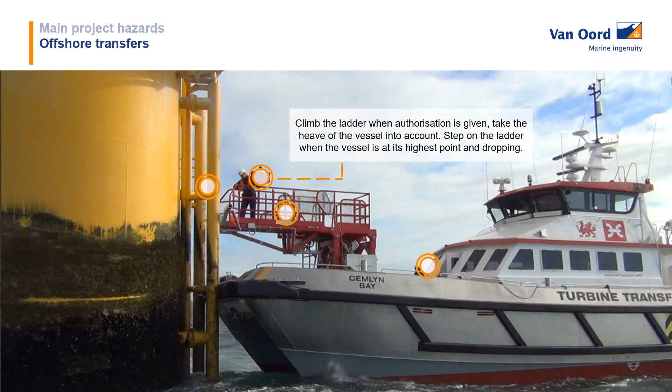During offshore transfers, climb the ladder when authorization is given. Take the heave of the vessel into account. Step on the ladder when the vessel is at its highest point and dropping. Don't rush while climbing, maintain 3-point contact and do not carry luggage.

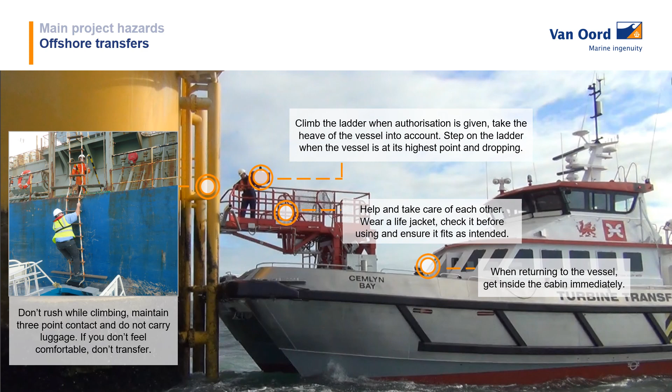If you don't feel comfortable, don't transfer. Help and take care of each other. Wear a life jacket, check it before using and ensure it fits as intended. When returning to the vessel, get inside the cabin immediately.

Check these points on a life jacket before wearing it. Do not use the life jacket if one or more of these points are not okay. The life jacket must be clean and undamaged. All points on the inflating device must be green and the cylinder must be unpunctured.

The manual inflation cord must be visible and ready for use. The life jacket must be certified as indicated on the sticker. If not present, the life jacket cannot be used. The stitches must be undamaged, the belt adjustable and the clasp closing properly.

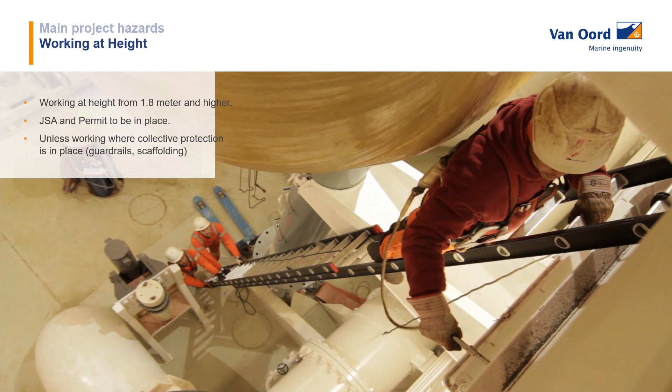When working from 1.80 meters and higher, the work is considered as working at height. A working at height permit must be in place and a job safety analysis has to be made. The only exception is when working with collective protection and guardrails or scaffolding installed.

When using a ladder, maintain 3 points of contact, do not work on the top 3 rungs, do not overreach, and use a fall arrestor. Ladders are primarily designed to get from A to B and can be used for approximately 30-minute activities only. 10 kg is the maximum load that you can work with when standing on a ladder. No lone working is allowed, people must help to stabilize the ladder at 75 degrees. The ladder must be secured at the bottom and the top, to prevent movement.

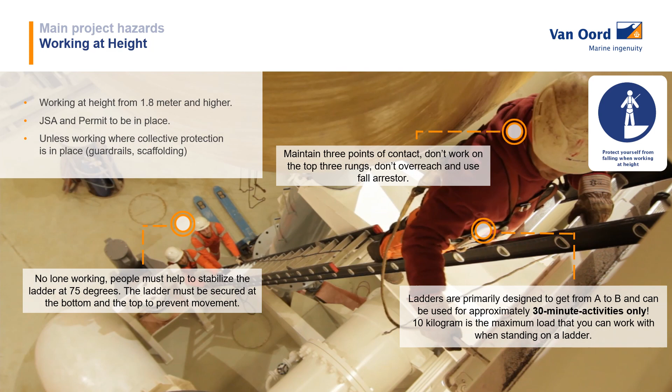Many heavy equipment-related incidents occur within our industry. Always position yourself in a safe zone. If you observe blown-over signs, barriers or safety cones, don't wait for others to put things back in place. If you see it, you own it.

Don't stand near and especially not behind a vehicle. Stay in well-protected zones and always wear your high-visibility clothing. If you have to approach a vehicle, ensure eye contact with operators, see and be seen. Wait until the vehicle is completely stopped.

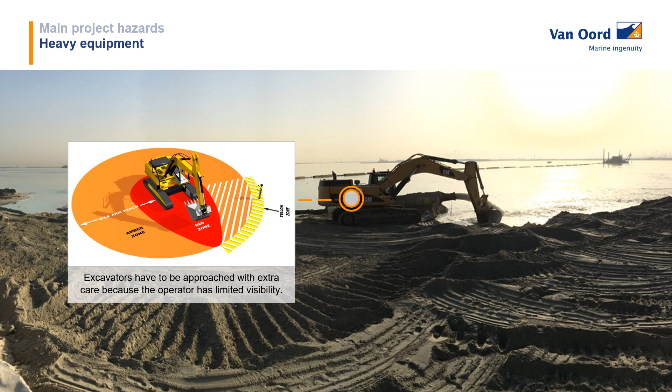Excavators have to be approached with extra care because the operator has limited visibility.

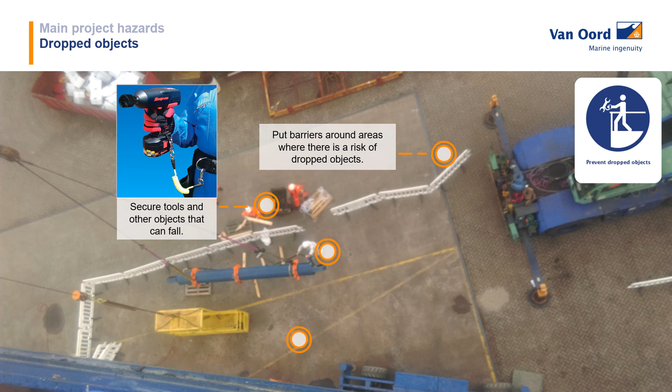To prevent dropped objects, secure tools and other objects that can fall. Put barriers around areas where there is a risk of dropped objects. Use suitable lifting arrangements, secure the load properly and use lifting bags to lift tools. Maintain good housekeeping to avoid loose objects. Guard rails and scaffolds must have toe boards to prevent dropped objects.

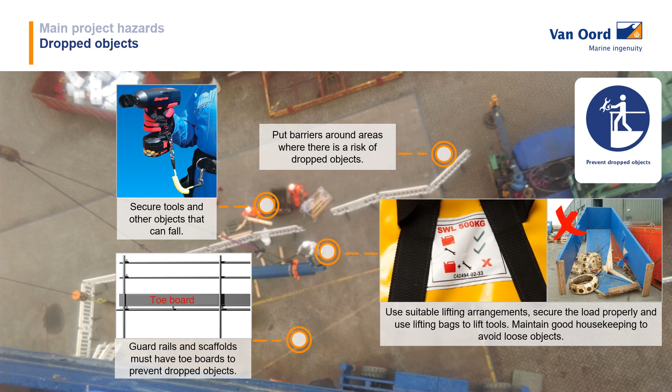The main hazards of chains and lines under tension are the snapback zones, and slips, trips and falls. Mooring lines are handled by a competent person. Never stand on or walk over tensioned lines, and do not stand in the eye of a line.

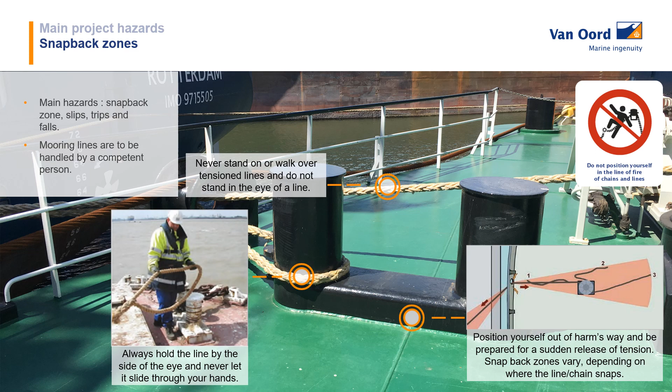Always hold the line by the side of the eye and never let it slide through your hands. Position yourself out of harm's way and be prepared for a sudden release of tension. Snapback zones vary, depending on where the line or chain snaps.

The following applies for all types of lifting. Follow the instructions of the person in charge of the lift. Do not walk under the suspended load. Lifting zones must be marked and have barriers placed, both on marine equipment and onshore. Do not enter these zones and take the load shadow into account.

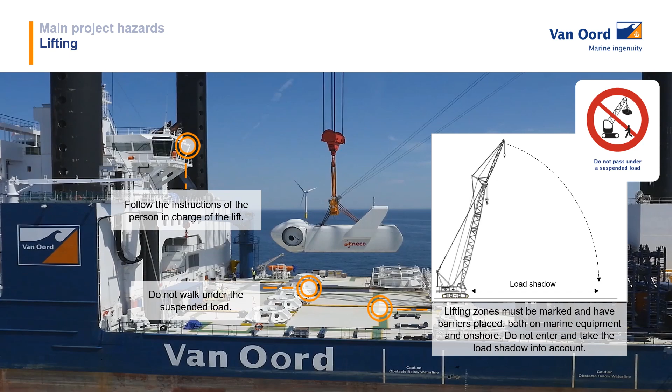A permit to work and job safety analysis have to be in place when working on energized systems. Only competent and authorized persons are allowed to work on these systems. First, check and measure energized systems before taking any action.

Ensure no stored energy remains. Confirm that isolation measures have been taken, such as locked switches, locked doors and closed pipes. Use a lockout-tagout system. It may only be removed by an authorized person.

Confined spaces are identified as one of the 9 high-risk activities at Van Oord. A confined space, such as a tank or pipe, has difficult access and ingress. It can contain explosive gas or poisonous air, or you can encounter other dangers such as lack of oxygen, dropped objects and slips, trips and falls.

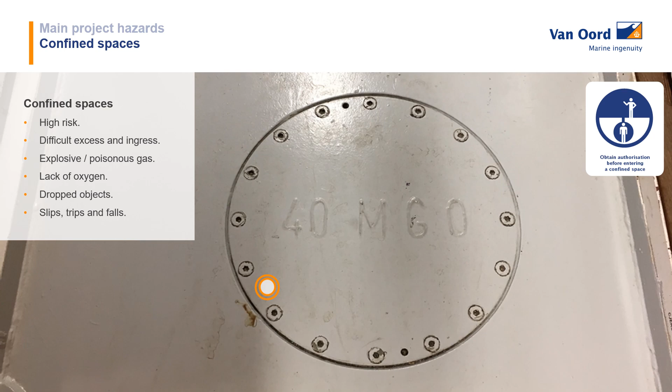We do not enter tanks which contain or have contained chemicals or fuel and do not perform the gas measurements. A certified third-party company must be hired.

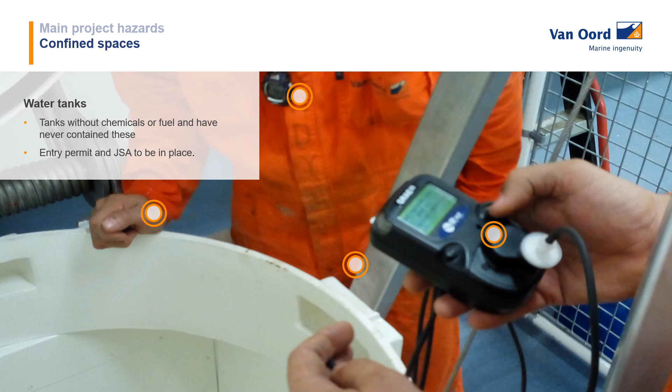Water tanks are tanks without any chemicals or fuel and have never contained these. An entry permit and job safety analysis need to be in place. Before going inside, establish ventilation and measure the air quality in the confined space.

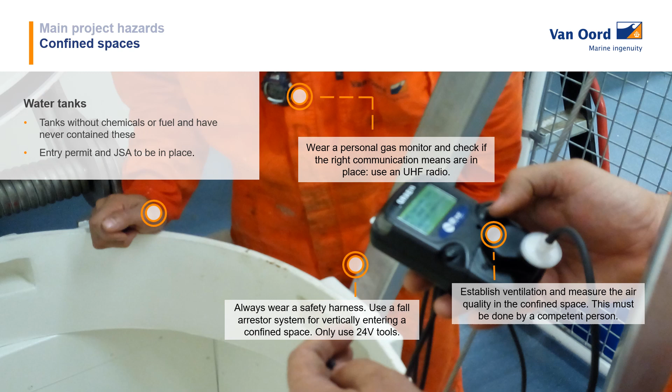This must be done by a competent person. Wear a personal gas monitor and check if the right communication means are in place. Use an UHF radio. Always wear a safety harness. Use a fall arrestor system for vertically entering a confined space. Only use 24-volt tools. The manhole watch is on standby and alerts the rescue team in case of an emergency.

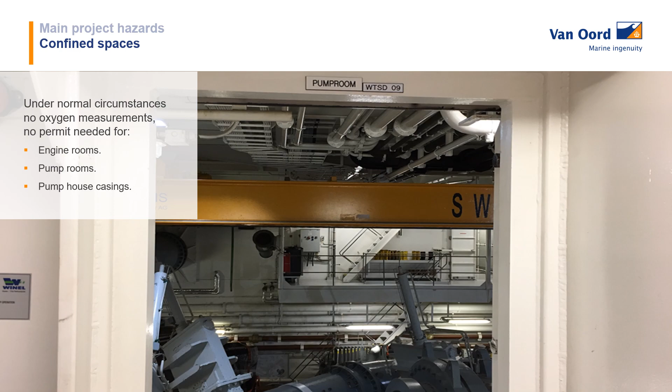Under normal circumstances, no oxygen measurements are required, and no permit is needed for engine rooms, pump rooms and pump house casings.

Poor housekeeping are often the cause of incidents. Examples of hazards are tripping over loose objects on floors, stairs and platforms, being hit by falling objects and slipping on greasy, wet or dirty surfaces.

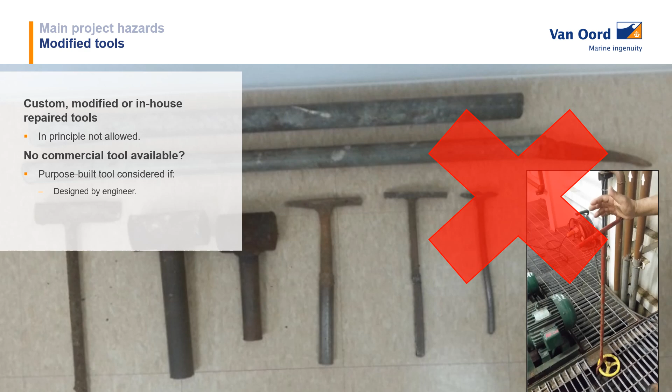In principle, it is not allowed to use custom-made, modified or in-house repaired tools. If there is no commercial option available, a purpose-built tool may be considered if the tool is designed by an engineer and if the tool has followed testing requirements. Finally, approval needs to be given by the project management.

For the storage of hazardous products, the following requirements must be met. Storage areas must be bunded, kept clear and clean. The area must be secured, lockable and well ventilated with natural or forced air.

All hazardous products must have a safety data sheet and must be available at the storage area and read before usage. Depending on the type of product, a JSA and specific PPE might be needed.

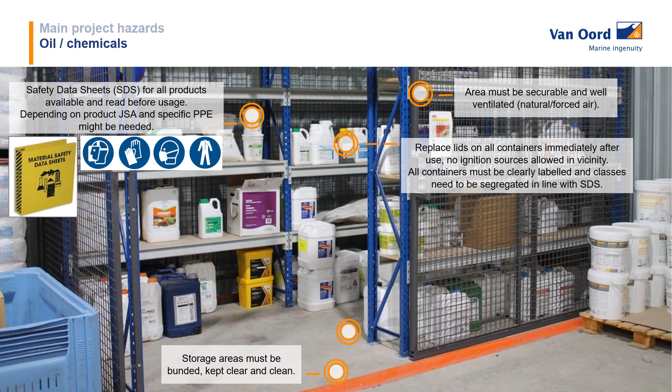Replace lids on all containers immediately after use and no ignition sources are allowed in the vicinity of hazardous products. All containers must be clearly labeled indicating its contents and classes must be segregated in line with the safety data sheets. Light sets, generators and other oil leak-prone items must be placed on drip trays.

Spill equipment needs to be readily available on various locations on site.

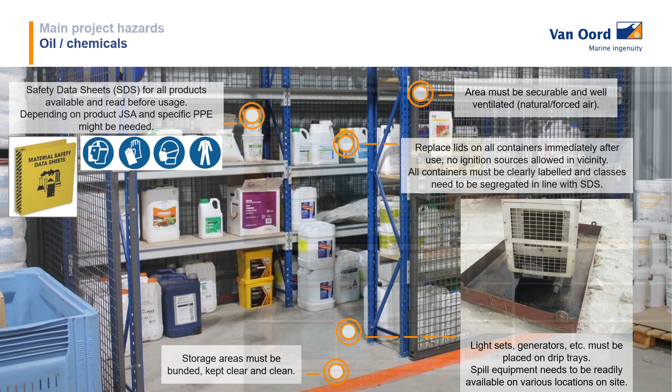Waste is segregated in 3 categories: domestic and municipal waste, non-hazardous industrial and commercial waste, hazardous waste. Make sure you use the right container for disposing your waste.

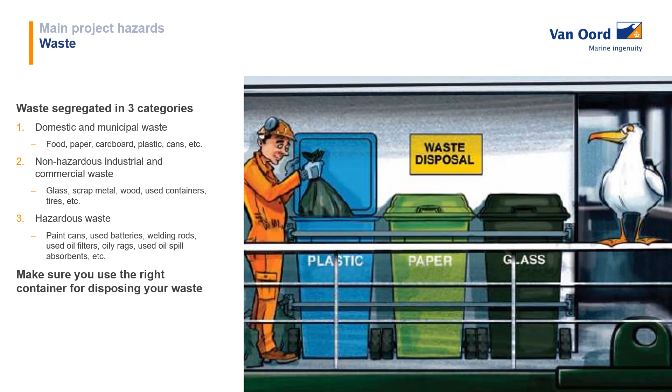During summer, continued exposure to high temperature and humidity or to the sun is the common cause of heat cramps, heat exhaustion and heat stroke.

In case you are exposed to high temperatures, make sure to drink more fluids. Regardless of your activity level, do not wait until you are thirsty to drink. Do not drink liquids that contain caffeine, alcohol or large amounts of sugar.